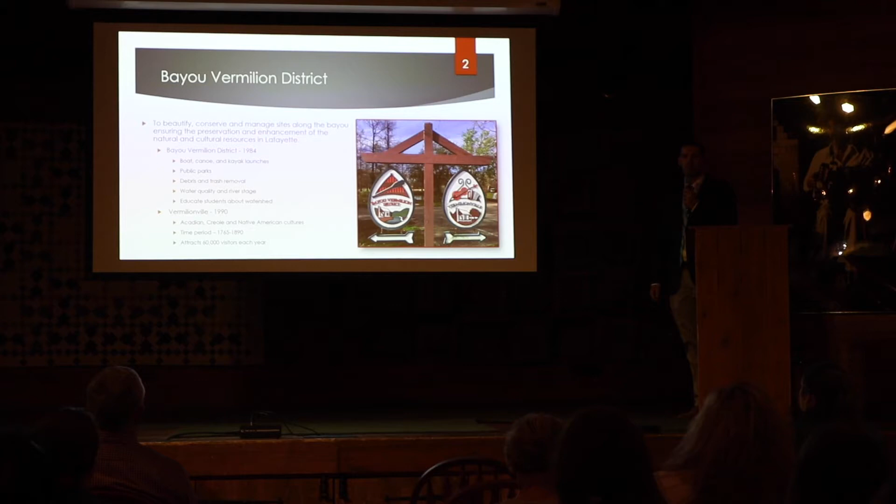On the cultural side of their mission, Bayou Vermilion District opened up Vermilionville Living History Museum and Folklife Park in 1990. And since then, the park has become one of Lafayette's premier tourist attractions, welcoming over 60,000 visitors per year.

So Bayou Vermilion District has put a lot of work into their project, and they have a vision of what they want to see the water research park to be. So when they came and introduced the project to us, they had a packet full of all their purpose for the park, their water flow features, as well as all the structures and designs of what they wanted to see in a park. So we took that as a great guideline to move forward with in designing these features.

According to Bayou Vermilion District's Department of Water Quality, some of the purposes of their park are to improve the existing water features by introducing water movement throughout them, which will actually eliminate some of the need for chemical maintenance. They also want to create multiple educational and demonstration areas throughout the park, as well as a new watershed exhibit, and they want to build a water quality laboratory to measure the water quality of the Vermilion River.

Bayou Vermilion District expects the Water Research Park to bring in about 100 visitors per day.

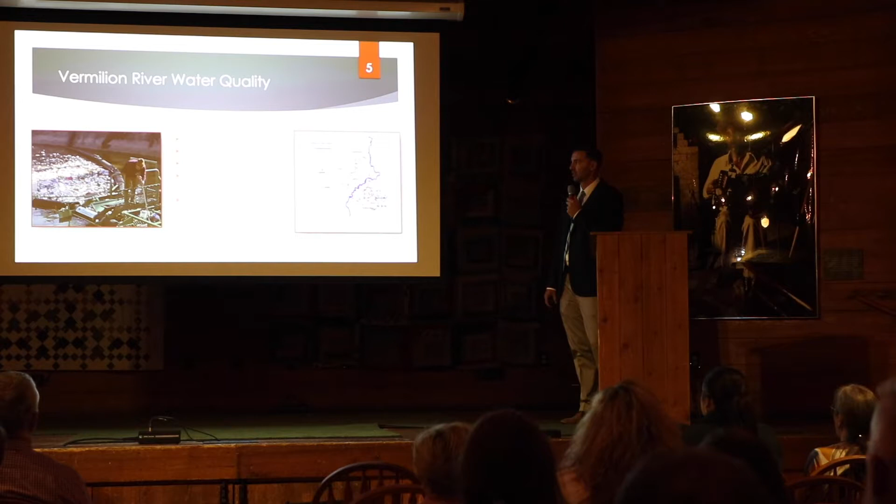So there's a couple of issues that stem the idea of creating a water research park. The first one is the water quality of the Vermilion River. The Vermilion River contains lots of trash and debris. It is very high in total suspended solids, total dissolved solids, and high in fecal coliform. It also has low dissolved oxygen levels. The Louisiana Department of Environmental Quality actually lists the Vermilion River watershed as impaired waters.

The second issue was the existing water features within the park. As you can see here, the aeration pond and the Petit Bayou, both of these existing water features, get supplied water from stormwater runoff, and the only way the water actually leaves the park is by being pumped into the Vermilion River. So during dry periods, the water is held up within these ponds with little to no movement, and the water becomes stagnant, which contains low dissolved oxygen levels and provides an environment for invasive plant species to thrive.

So once we were introduced to the project and we took the information that BVD gave us, we got to work as a class, and we came up with some objectives on what we wanted to do as far as designing the water research park.

One of the first things we did was we determined the watershed that flowed into the property, and we analyzed the stormwater runoff characteristics and how they actually affected the water research park.

Second thing we did was we designed all the water flow features throughout the park, as well as determined the flow rates that go through them.

We designed and analyzed all of the structural features throughout the park, along with their foundation systems. We also designed other features throughout the park while optimizing space in certain areas of the site.

We researched and determined the permits required to build the Water Research Park. And lastly, we came up with a cost estimate on how much we think the Water Research Park is going to cost to build.

Besides what we got from BVD, we sought out additional resources to help with our design. One of the first things we got were the original plans for Vermilionville from Domingue Szabo. We also got the proposed Water Research Park building from architect Lynn Guidry. We received site survey information from Spec Engineering and Lafayette Consolidated Government, as well as LiDAR data and subsurface drainage maps. All of our water quality and river stage information came from USGS.

Although we got a good bit of information, there were still some gaps. Luckily, we were close enough to the BVD property to perform multiple site visits, where we were able to do our own site surveying. Through these surveys we determined elevations of critical points throughout the site, the elevations of the existing water surface, and the depths of all the water features.

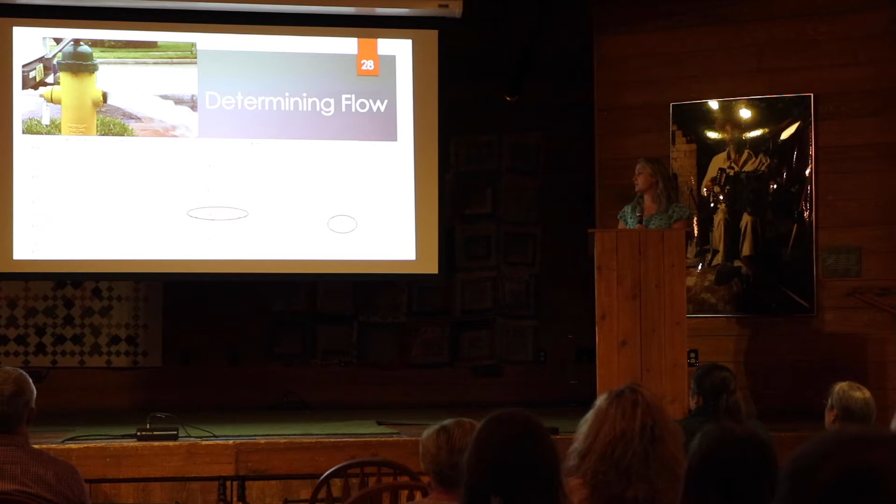This was found to be the ditch entering Petit Bayou. With that information, we then went through iterations of different velocities, taking into consideration erosion protection, weed prevention, as well as the client's desire to move water through the park. We came to a conservative velocity of about 0.5 feet per second with an approximate flow rate of 3,300 gallons per minute.

The graphic shown here is a fire hydrant that's pumping about one-third of what we plan to be pushing through the park. That's just to give you an idea, which you can't see, sorry.

We also needed to determine the floodplain delineations within our site. Shown in the red hatched area here is what is known as a floodway. There are very strict construction limitations when building within a floodway, so we tried to steer clear of that, even though we worked with it.

The green area shown here is known as flood zone AE for our particular property. This is defined by FEMA to be a high-risk area for a storm of 100-year return period, and has a base flood elevation of 15 feet, NAVD 88.

So I'm pretty pumped to tell you all about this next part of our design.

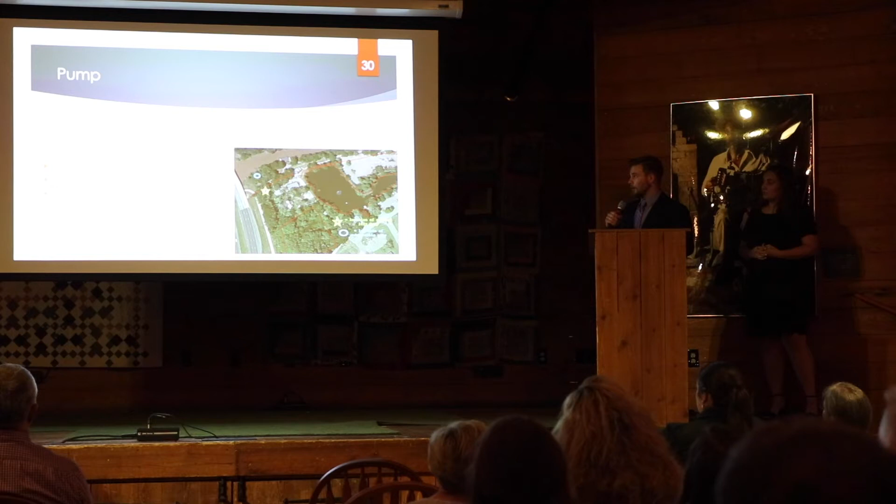After we came up with our design flow rate, the next thing we needed to do was figure out what type of pump we needed and the location, as well as the type of structure to protect that pump. If I direct your attention over here, denoted by this blue circle, this first option was a submersible pump with a wet well design placed inside of the floodway. Here, denoted by the yellow star, was an above ground structure with a suction lift pump outside of the floodway. After speaking to BVD, we decided the best option and the best design was the submersible pump with the wet well, due to its economical design and best design.

So here's a typical cross section if you were facing east. Here's the Vermilion River. The water would be gravity fed through this pipe here and into our wet well. Additionally, the water surface elevation in the river would dictate what the water surface elevation in the wet well would be.

Once the water is here, it will be pumped from our submersible pump up here and into our proposed channel. Additionally, if we ever needed to cut off the flow of water from the Vermilion to our wet well, we install a valve right here.

We chose the invert of this pipe here to be based off the 10th percentile water surface elevation of the Vermilion River. That way our clients can utilize their pump almost 90% of the time. We got that data from the USGS Surrey Street gauge and correlated the elevations accordingly.

Additionally, we needed to size this pipe in order to give us our design flow rate. We need this pipe to supply enough water for that flow rate. To do that, we used everyone's favorite equation, the Hazen-Williams equation, with the frictional losses and the minor loss equations, to iterate and find an adequate size of 18 inches. We double checked that and it confirmed that it will supply our pump.

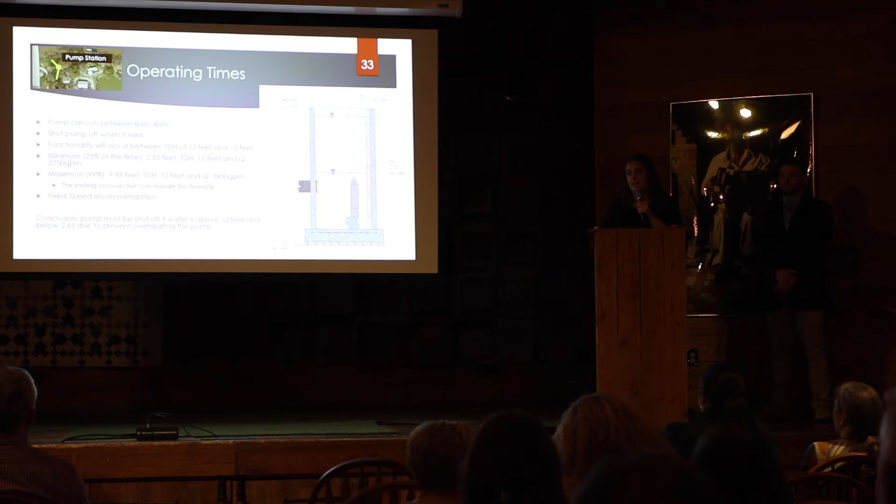We also wanted to narrow down our operational constraints by picking a minimum and maximum water surface elevation in the river, which is also the same water surface elevation in the wet well, to find our minimum and maximum flow rates and total dynamic heads, to make sure our pump will not be overheated or cause erosion throughout our system.

Our minimum water surface elevation, denoted by this line right here, is 2.65 feet. Anything below 2.65 feet in the river needs to shut off the pump because it will cause overheating in the pump.

Here is the maximum water surface elevation of 9.98 feet. This will provide a maximum flow rate of 3,450 gallons per minute, which is greater than our design flow rate of 3,300 gallons per minute.

Knowing our maximum flow rate, we then had to make sure and prove that this flow rate will not scour or cause erosion through our limiting cross section, and through calculations we did prove that to be true.

So starting our system, we place an 18-inch ductile iron pipe in the Vermilion River at 2-foot elevation. We make sure not to encroach upon the right-of-way of 100 feet set by the Army Corps of Engineers. This pipe is 150 feet with a 0% slope, and to prevent the pump from being damaged by debris...

We designed a T-shaped screen that has a spacing of 2 inches. This is to prevent the maximum debris from getting into our pump. Also, we increased the diameter of our screen to slow down the velocity so that debris does not get matted up against the screen.

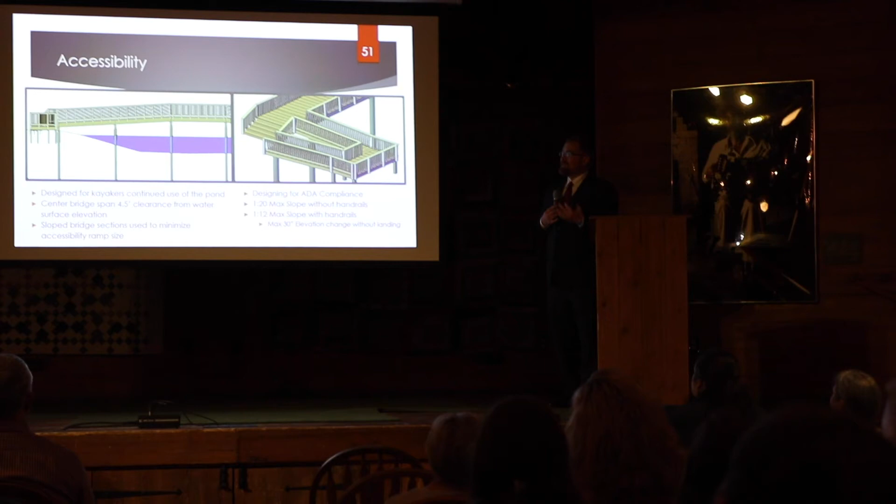Now that we have the horizontal location of the bridge, we turn our attention to the vertical location. There were two requirements we considered: first was the hydraulic features flowing beneath the bridge, and second was a client request to continue allowing kayakers to utilize the entire pond. We did some research and determined a 4.5-foot clearance from the water surface elevation would allow for this, and this requirement governed our design.

Now that we have vertical and horizontal locations determined, we turned our attention to pedestrian access. We designed this with the American Disabilities Act, ADA, in mind, and also to work within the space we had available. We turned to a sloped bridge on the outermost two spans, which you can see on the left-hand side. This slope was slightly less than 1 on 20, which was adequate for a continuous ADA-compliant slope.

That gave us about 2.5 feet of the 4.5 foot requirement. For the remainder, we looked at steps and handicap ramps, again designed for ADA, including features like handrails and guardrails. It would look very much like the rendering on the right-hand side.

I'd like to start off by introducing the main purpose for each of these structures. The pedestrian bridge serves as a clear path for site tours. It also provides access to different locations on the site with minimal travel. The pier, a tourist feature, allows for fishing as well as providing an assembly area with benches where tourists could gather, take pictures, and enjoy the beautiful scenery of Vermilionville.

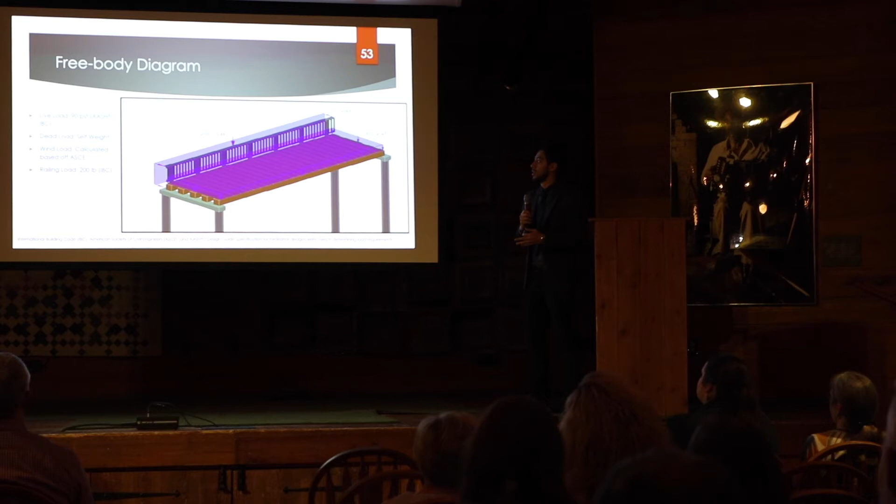The 200 pound load in each direction is a concentrated point load that the guardrails would be designed to resist, providing rigidity for the structure as well as an additional factor of safety for pedestrians. All these loads are minimum requirements based on the International Building Code, the American Society of Civil Engineers, and the AASHTO Design Guide for Pedestrian Bridges.

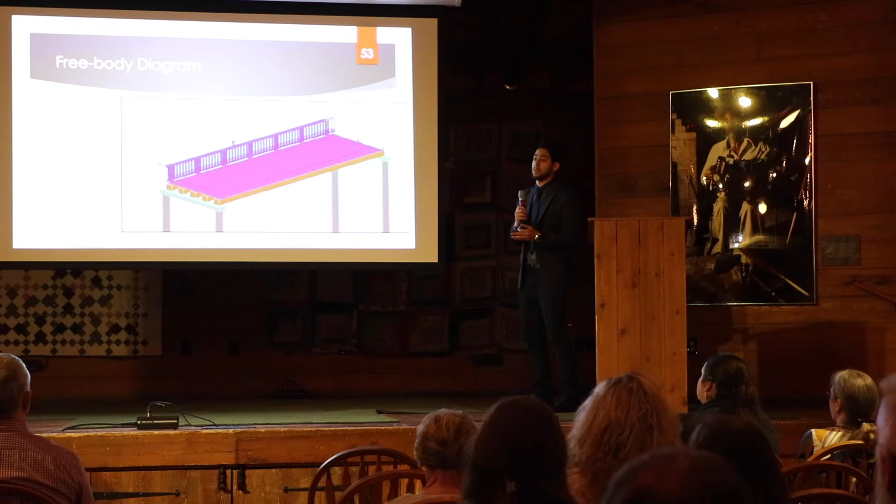Now I'd like to highlight each of the members we had to design for and what role they play in supporting the structure. In purple, we have the deck boards, which serve as the main walking surface for pedestrians. The loads on the deck board are supported by these 5 beams shown below, referred to as stringers. The loading on the stringers, as well as self-weight, is transferred onto the green beam here, referred to as a bent.

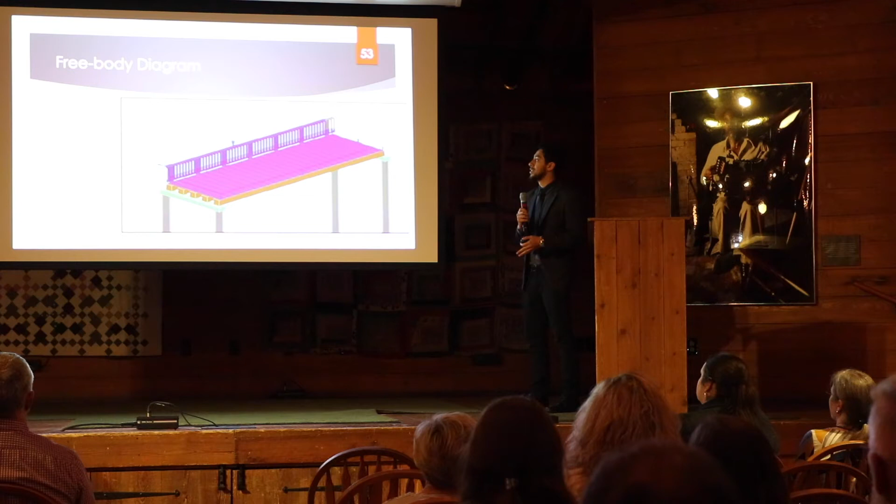The bent would then be held up by these 2 gray-looking columns known as pile supports. The piles would be driven deep into the ground to provide enough resistance and stability to uphold the entire structure in place.

Our design procedure was all done in accordance with the National Design Specification for Wood Construction. All of the members that we had to design, which I highlighted in the previous slides, were analyzed as bending members. These are the deck boards, the stringers, and the bents.

As a result, the member sizes were selected to satisfy 3 design parameters: flexure, shear, and deflection. Flexure design states that the bending strength of a member must exceed the bending stresses that act on it, as shown in that figure. Shear design states that the shear strength of a member must exceed the applied shear stresses on that member. Shear stresses are the stresses that act parallel to a material surface, as shown in the figure below, caused by the loading that acts on that member.

Finally, the International Building Code dictates that the maximum deflection a member can experience must not exceed 1/360th of the member length.

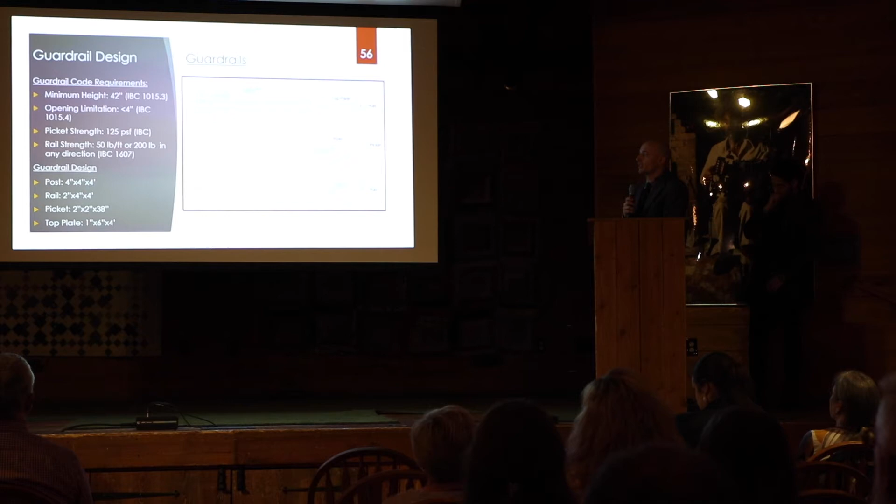Now moving on to the design of the guardrails, which were used for both the fishing pier and the pedestrian bridge. Code dictates many of the requirements for them. There's a minimum height requirement of 42 inches with respect to the top of the walking surface. There's also an opening limitation, meaning a 4-inch sphere should not be able to freely pass through any of the openings located throughout the guardrails.

Pickets must be able to withstand a 125 pound per square foot pressure. The guardrails themselves must be able to withstand either a 50 pound per linear foot distributed load or a 200 pound concentrated point load applied vertically or horizontally. On top of that, the guardrails must withstand wind pressure and support their own self-weight.

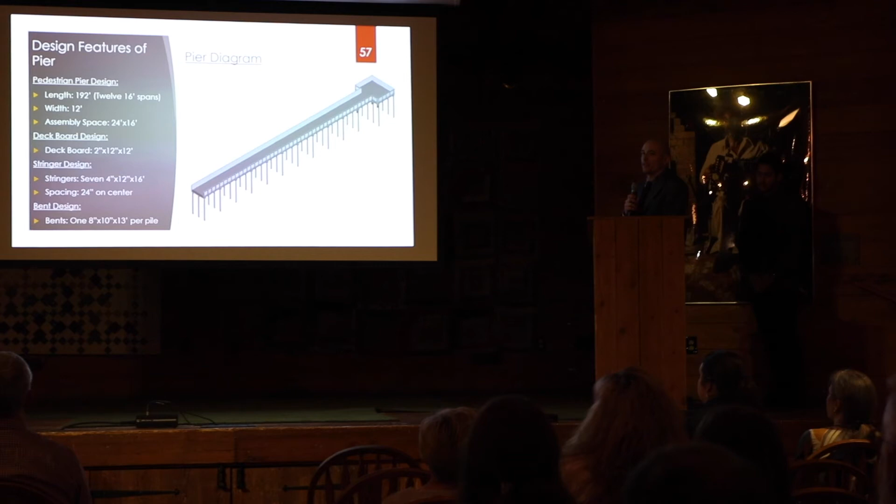Taking all that into consideration, this is a visual of what a typical section would look like for our guardrails. Now moving on to the design features of the pedestrian pier, we went with a total length of 192 feet, consisting of 12 16-foot spans. For the first 11 spans, the width was 12 feet wide, and the last span was a dedicated assembly space to hold around 25 to 30 people for tour groups. We believe a 24-foot by 16-foot section would be adequate for up to 32.

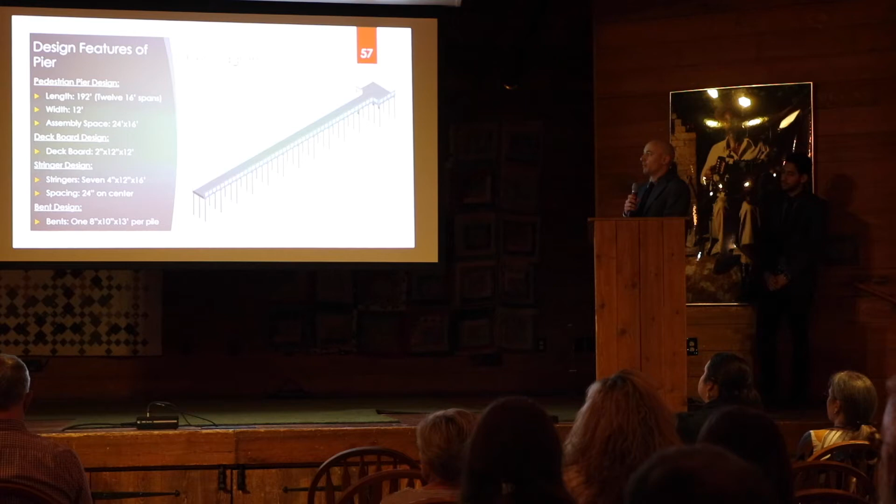As for the design of specific members, we used 2x12 deck boards to support the loads from pedestrians. Those loads, along with the guardrails, were transferred to 7 4x12 stringers, and finally all of that was supported by one 8x10 bent.

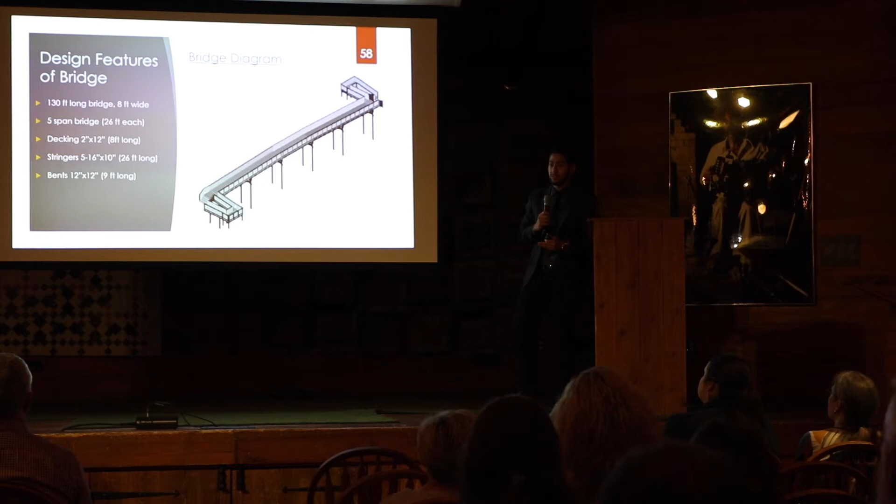The pedestrian bridge design features discussed here include member sizes selected to satisfy the design criteria discussed in previous slides. The pedestrian bridge would be 130 feet long, 8 feet wide, and a 5-span bridge with each span running 26 feet long. The decking would consist of 2-inch thick by 12-inch wide deck boards at 8 feet long each.

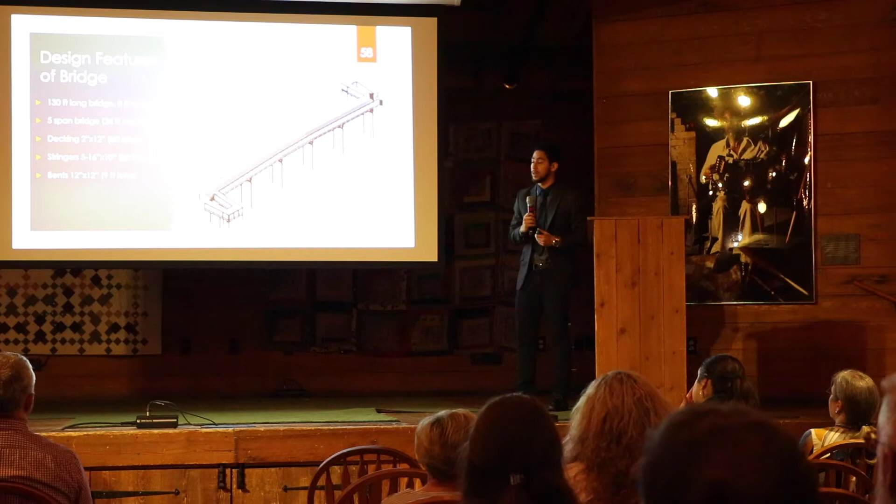These deck boards would then be supported by 5 stringers. Each stringer would be 16 inches thick, 10 inches wide, and 26 feet long. This would all then be supported by 9 feet long, 12-inch by 12-inch bents.

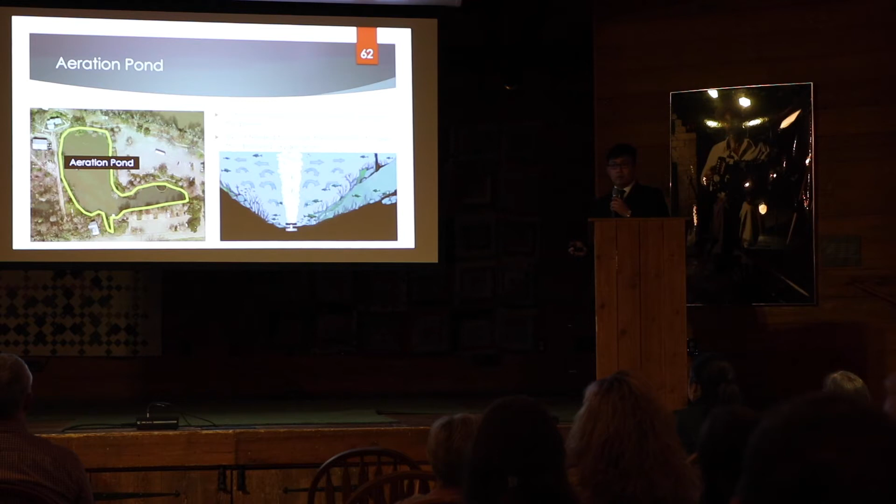Now let us talk a little about the aeration pond. Currently, the aeration pond has diffusers, bubblers, and water fountains, and these water features are important for us, for BBD, to increase the dissolved oxygen level within the pond. Therefore, our client intends to keep these water features in the pond to maintain a proper level of dissolved oxygen to support aquatic life within the pond.

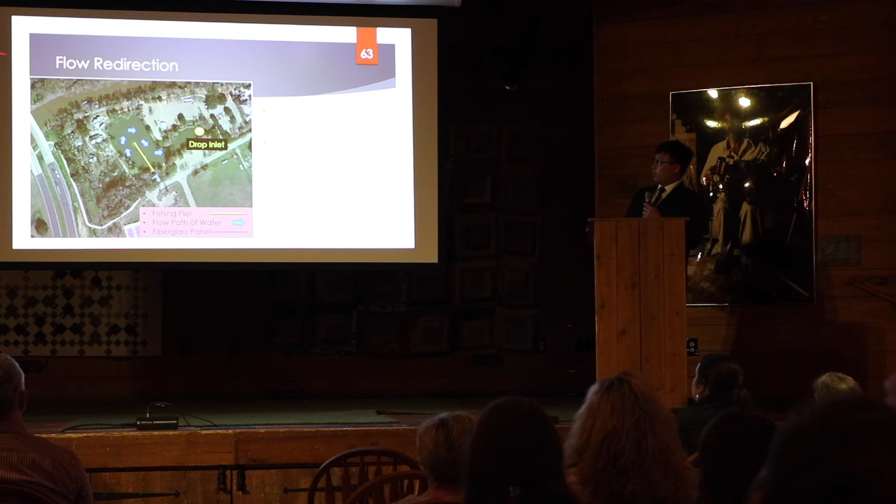In order to prevent stagnation within the pond, our client also intended to redirect the flow of water around the fishing pier before it ultimately discharges into the drop inlet. To achieve this flow redirection, we propose to attach a fiberglass panel to the west side, along the west side of the fishing pier.

The fiberglass panel that we recommend to use is the fibercore panel from Fibertech. It comes with an exterior gel coating which provides resistance to UV degradation and weathering effect. In addition, the manufacturer also certifies that their panels are rot-proof and corrosion resistant, and ultimately the lightweight nature of the fiberglass panel drives us into making this recommendation.

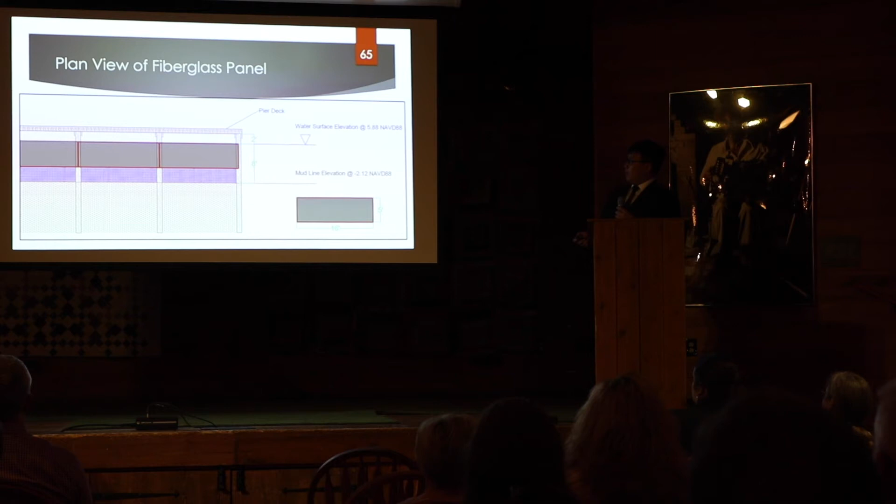To get a better idea of where the fiberglass panel will be installed on the pile, this diagram shows the front view of the west side of the pier. As you can see here, each fiberglass panel is 16 feet long, 5 feet wide, and 3 millimeters in thickness. The fiberglass panel will be secured at water surface elevation.

If you look at the diagram again, there will be a space between the fiberglass panel and the bottom of the aeration pond, where the mud line will be. The reason for this gap is to allow some of the water to flow under the fiberglass panel, to prevent stagnation of water under the fishing pier.

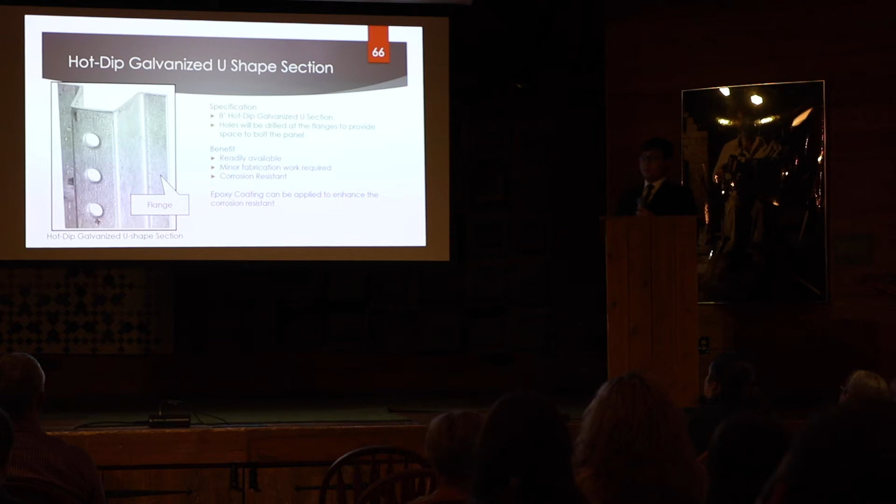In order to secure the fiberglass panel on the fishing pond, we propose to use a hot dip galvanized U section. The reason we chose this section is due to its availability in the market and the nature of hot dip galvanized steel being corrosion resistant.

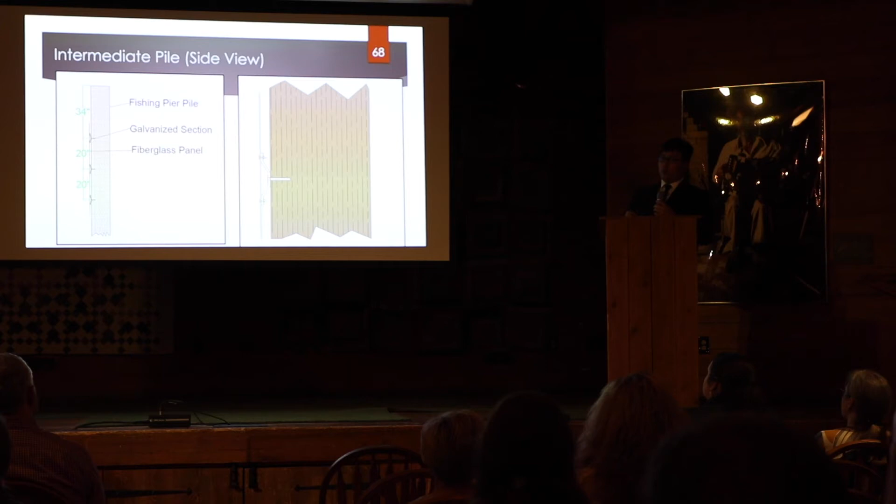To get a better image of how the U section will be used to help us secure the panel to the pile, this diagram shows the proposed placement of U section onto the different sections of the piles. As shown in the previous slide, on the intermediate pile, we will have 3 U sections spaced at 20 inches apart. On the right hand side of the diagram, this shows the proposed method of attaching the whole system onto the pile.

Currently, there are 3 existing aeration units as well as a fountain feature located within the aeration pond. Assuming that only half the pond will be aerated due to the flow diversion by the pier, at an average temperature of around 68 degrees Fahrenheit and an approximate water depth of 8 feet within the aeration pond, we determined that the existing 3 aerators need approximately 40 hours to raise the dissolved oxygen levels from 3 milligrams per liter, which is a typical value found in the summer months from the Vermilion River, to our recommended number of 5 milligrams per liter within the pond.

Now let's talk about the aeration pond drop inlet. The existing drop inlet on site has an elevation of 6.38 feet NAVD88. We are proposing to drop the inlet by 6 inches, thus gaining us approximately 1.3 acre-feet of storage. This gain in storage is vital for us to fulfill the no net fill regulation.

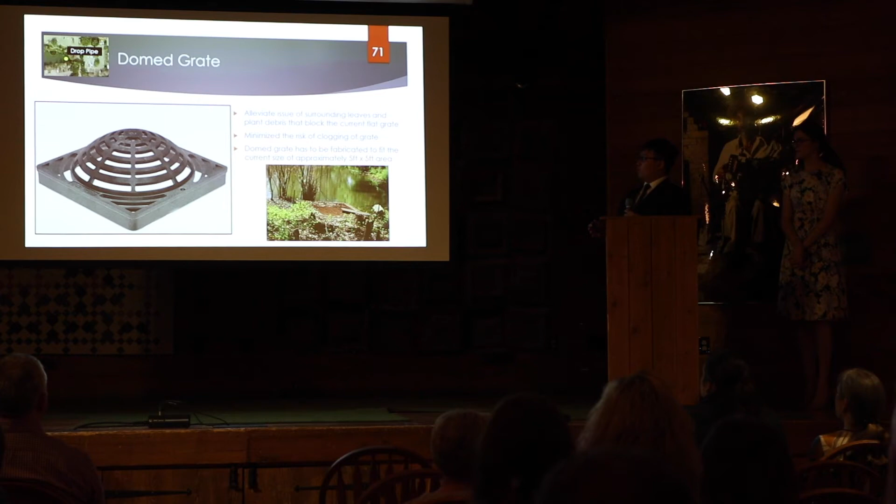As shown in the previous slide, the existing drop inlet has a flat grate that is often clogged up by plant debris. In order to alleviate this issue, we propose to replace the flat grate with a domed grate that provides a larger surface area for water to be discharged into the drop inlet.

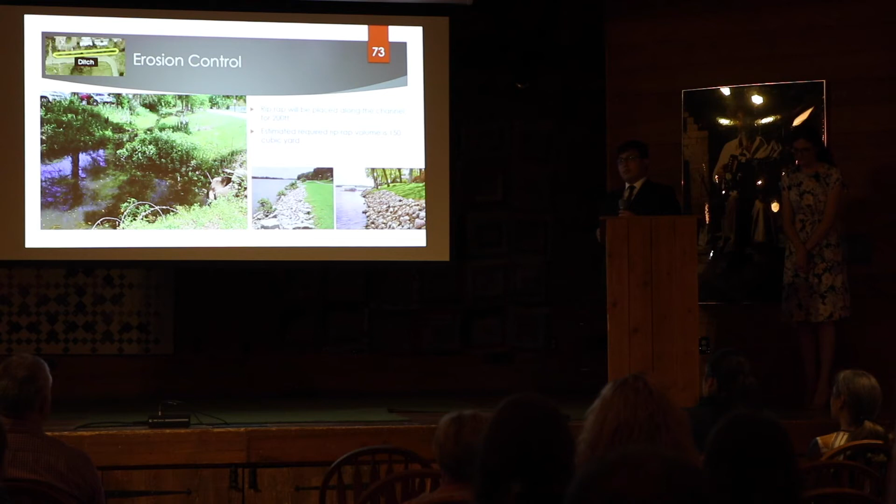The water that is discharged in the drop inlet will be discharged into this ditch before flowing into the Petit Bayou. Therefore, erosion control in the ditch is important. In order to minimize the effect of erosion at the ditch, we propose to line 200 feet of riprap along the ditch. We believe this will minimize the erosion effect.

As water enters the Petit Bayou, it reaches the end of our research park. Currently, the only way water can get out is via 2 stormwater pumps within Vermilionville. It is our objective that for any water we introduce to the park, we do not have to use these pumps. We will do this via a passive outlet.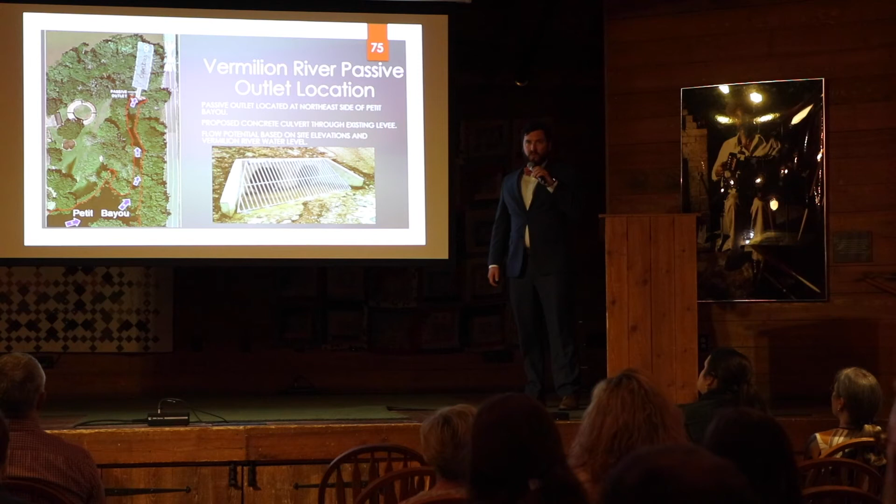The location of our outlet will be at the northeast corner of the Vermilionville village. Here, a levee separates Petit Bayou from the outlet ditch which leads to the Vermilion River. We propose using concrete culverts along with grating to keep out any debris or critters it may encounter. The flow potential through the culverts will be dictated by the inflow towards the culverts as well as the water surface elevation of Petit Bayou and Vermilion River.

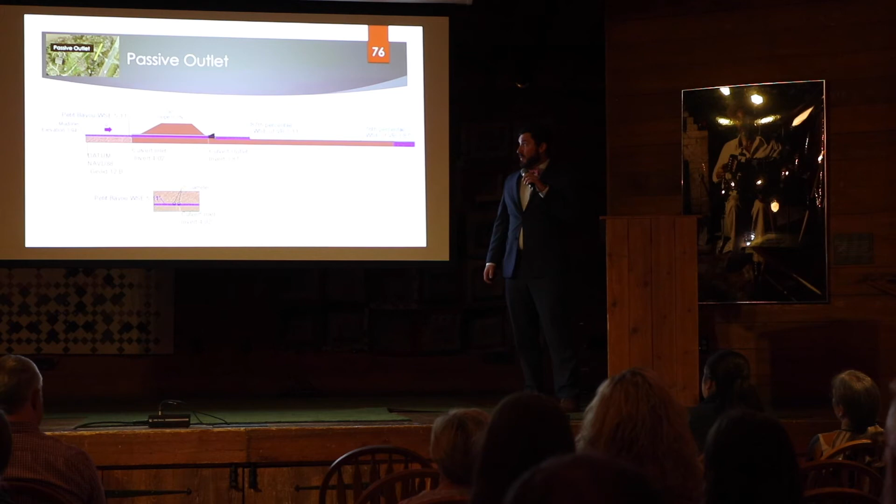Taking a look at the profile view of our passive overflow, we see that the designed water surface elevation of Petit Bayou is roughly 5 feet. With the help of our HEC-RAS model, we recommend setting 2 2-foot diameter concrete culverts at an invert of 4.02 feet. With a 0.3% slope, this will allow us to discharge our maximum flow of 3,450 gallons per minute. The Petit Bayou will be able to discharge so long as the Vermilion River is below 5.11 feet.

As the river rises above 5.11 feet, however, we will have to mitigate backflow. We recommend doing this with a duckbill check valve. We selected this device because of its low cracking pressure as well as its low head loss compared to other backflow prevention devices. Furthermore, it requires little to no maintenance and is able to seal around small amounts of debris while still preventing backflow from Vermilion River to Petit Bayou.

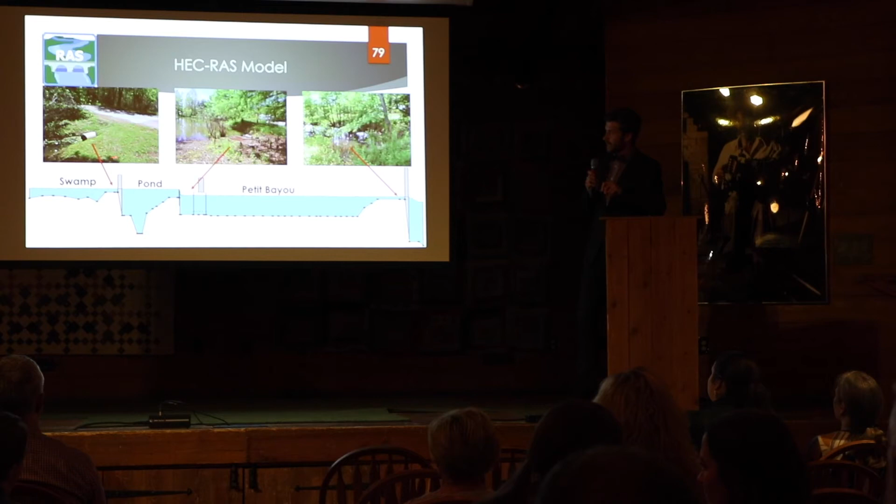First, the water enters the swamp and exits here through a culvert under the service road into the pond, where it leaves through the drop pipe into Petit Bayou, and finally exits through our proposed passive outlet into the Vermilion River. 2 models were run, one for the existing and one for the proposed structures.

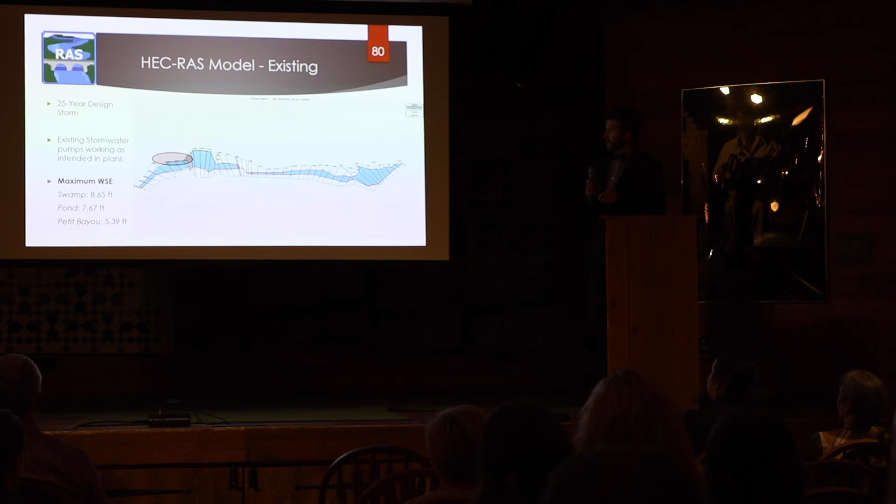Here are the outputs of the existing model. The flow shown represents a 25-year design storm with the existing stormwater pumps running as intended in the original plans, with a float set to 5.38 feet. You can clearly see that the water overtops the banks on the north side of the swamp, showing us that we need to build up a berm to retain the stormwater.

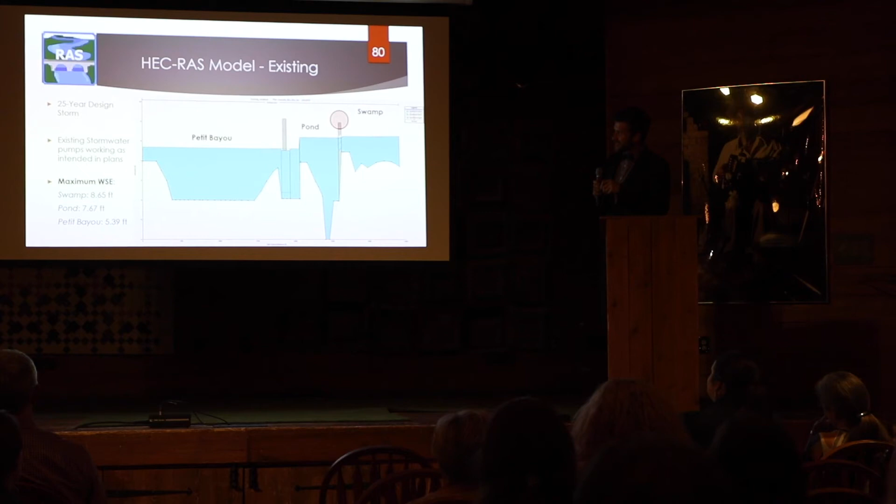Now, to avoid confusion, this image is flipped from images seen before, and this is just because HEC-RAS was being stubborn and wouldn't let us flip the image in animations. But you can still clearly see the road here, showing us the need to raise the road and redesign the culvert underneath.

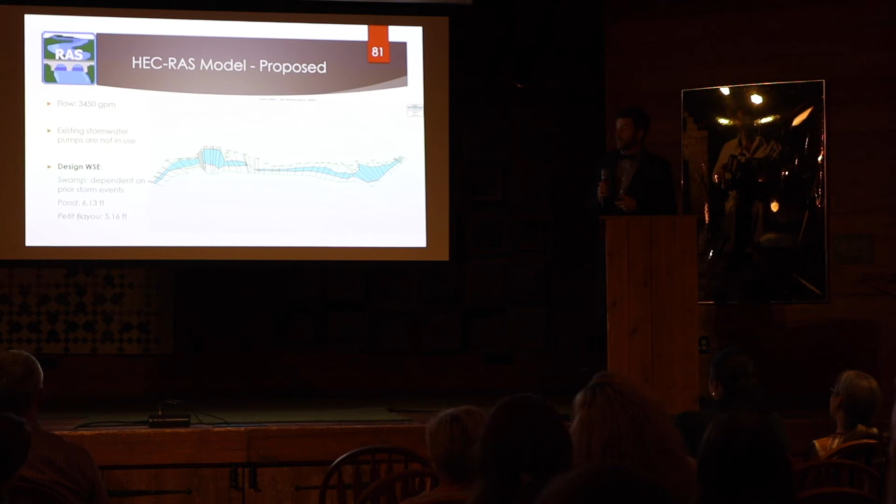In the proposed model, the shown flow is 3,450 gallons per minute, our maximum design flow, and the existing stormwater pumps are not in use. As you can see, the fluctuation in the water surface elevation is minimal, and a better view to visualize this is the profile plot, where you can see that the water will fluctuate about half a foot throughout our day-to-day pumping operations, and it will peak at 5.16 feet in Petit Bayou.

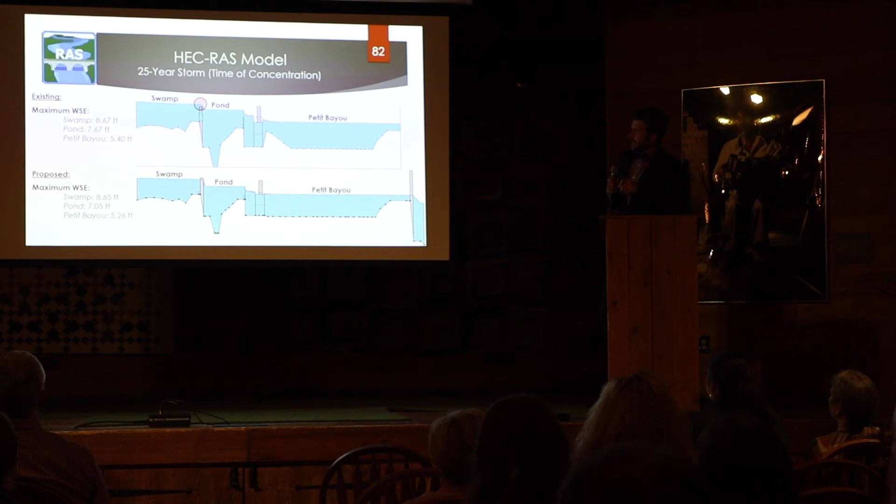Now to the results of our design. In the 25-year storm, in our proposed design, the road will not be overtopped anymore. Also, the stormwater in the swamp is contained by the banks, and we have created more storage by dropping the drop pipe from 6.38 feet to 5.88 feet.

Finally, HEC-RAS also gave us an idea about the usage of the existing stormwater pumps. Currently, these pumps are run manually, which made it hard for us to estimate the pumping hours. This will be changed in our proposed conditions.

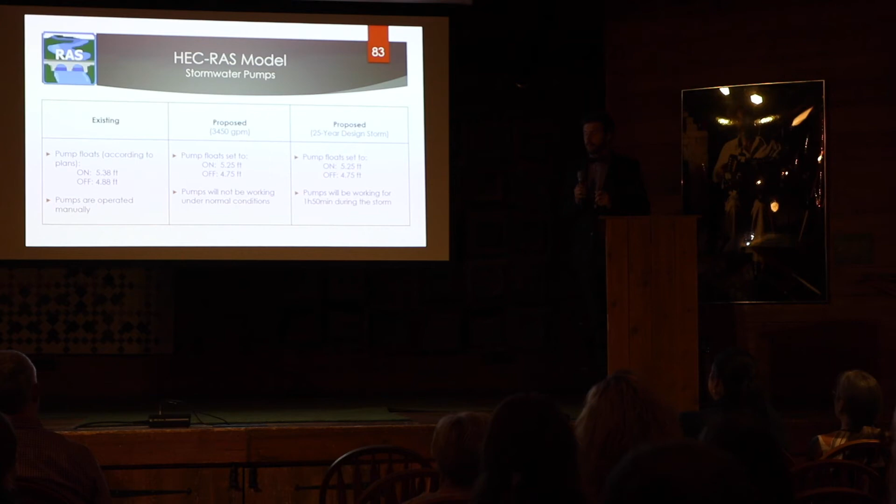The pumps will not be running in day-to-day operations due to the float being set higher in Petit Bayou than the water surface elevation, and they will only run for about 1 hour and 50 minutes during our 25-year design storm. Again, we've created some storage by dropping the pump float by 0.13 feet, from 5.38 feet to 5.25 feet, making our design more predictable, economical, and most importantly, less likely to flood.

We were really hoping Franz would do a little bit of that in German.

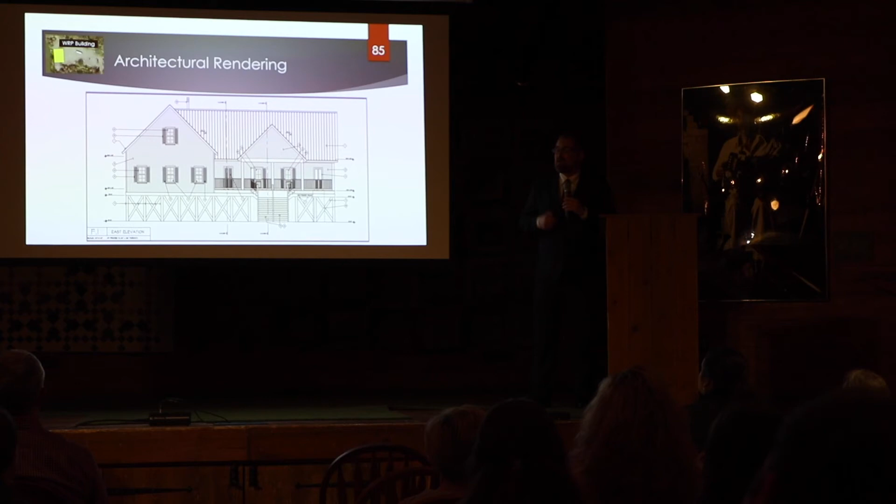Here we have an architectural rendering provided to us by Mr. Guidry, who is the architect currently working on the structure. This structure will be utilized for two purposes: on the right-hand side will be a watershed exhibit space, and on the left-hand side will be laboratory and office spaces.

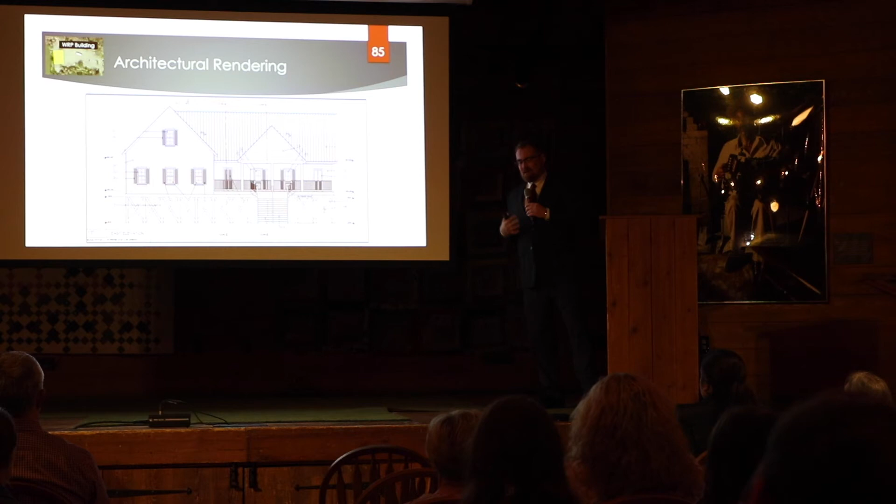Typically, a structure of this type will be designed by a code called IBC, the International Building Code. IBC is a prescriptive code. For most situations, it will require minimum member sizes and spacings, things of that nature, and this building will be designed in that method.

Some might be thinking, well, what did y'all do? Fortunately for us, this building has several components that fall outside the limitations of this code, specifically the roof structure above the exhibit space.

It's a very large span, a very large open space, and the floor systems -- due to the loadings that will be applied to that system. The other task we had was to analyze the building as a whole to come up with loadings on the foundation so we could do foundation design.

ASCE 7-10 and the International Building Code required that the exhibit side of the building be classified as an assembly space with a recommended live load of 100 pounds per square foot, and the laboratory side be classified as an office space with a recommended live load of 50 pounds per square foot.

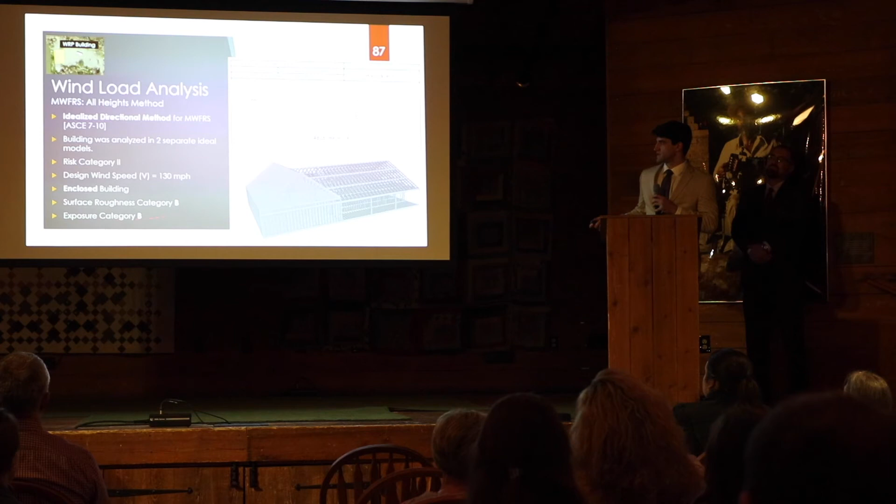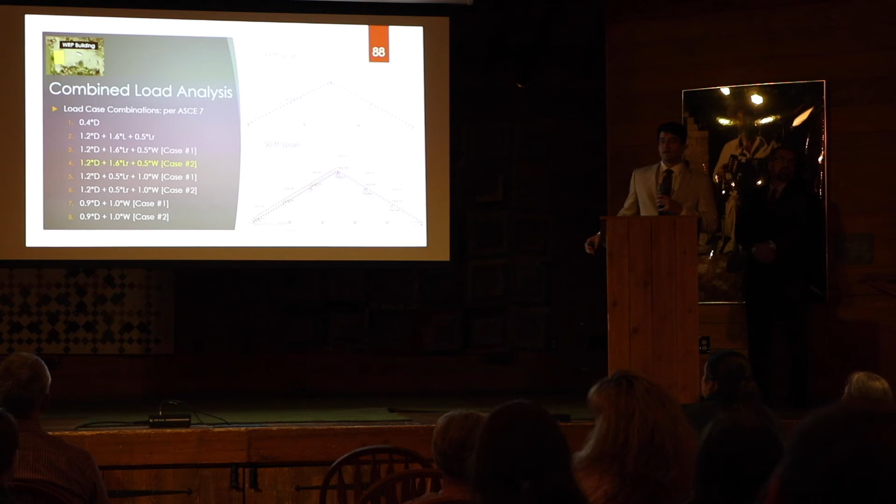In order to conduct our wind loading analysis of this building, we considered two systems and split the building in two. This gave us two idealized models to conduct our wind loading analysis for various wind loading conditions. Eight load case combinations were used in our analysis, and the one that yielded the highest loading results, the worst case scenario, governed our design. This is what we used to design our members.

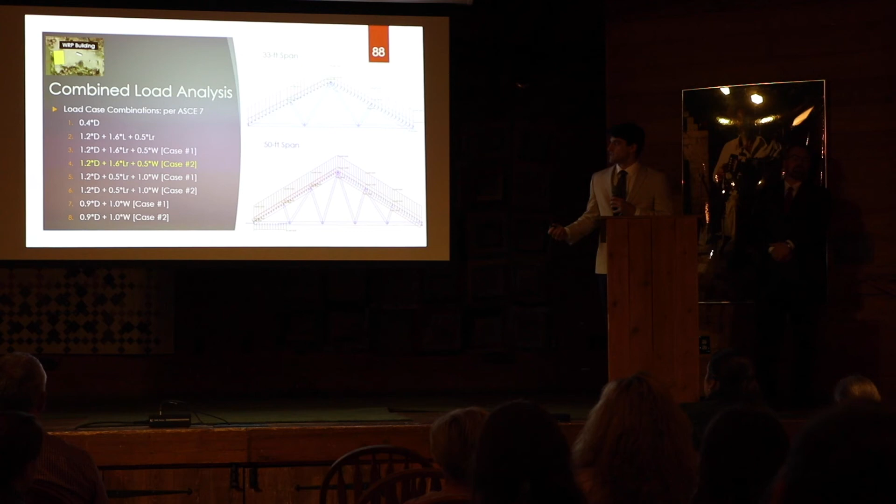What we chose was Southern Pine number 1, and the National Design Specification for wood construction was utilized throughout our design process. The main strengths checked were bending, shear, tensile, and compression, perpendicular and parallel to the grain of the wood.

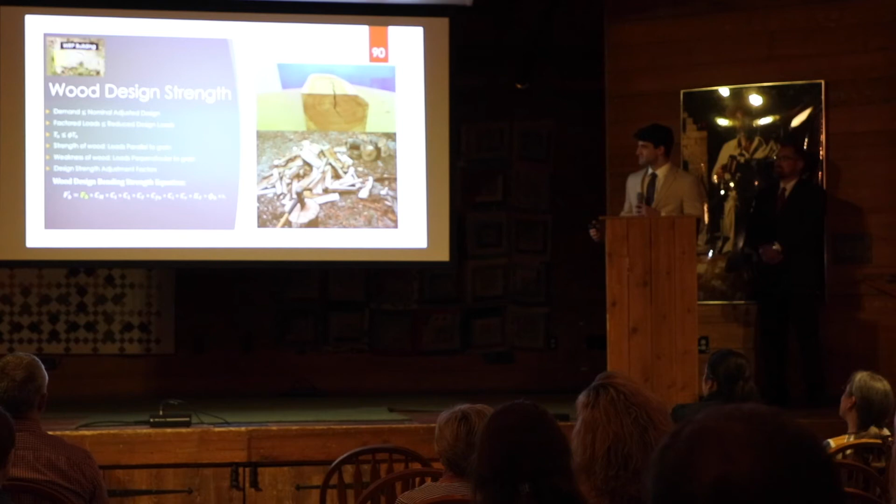We had to make sure that the loads we calculated previously remained less than our design loads, so we checked every single one of them as stated. It's important to know that this would prevent failure in even the worst case scenarios.

Wood is not a homogeneous material. It's not uniform throughout, which means it splits easier one way, as shown -- that's why you chop wood like that and not the other way. So if a tensile load is applied parallel to the grain of the wood, it resists a lot better; perpendicular, not so much.

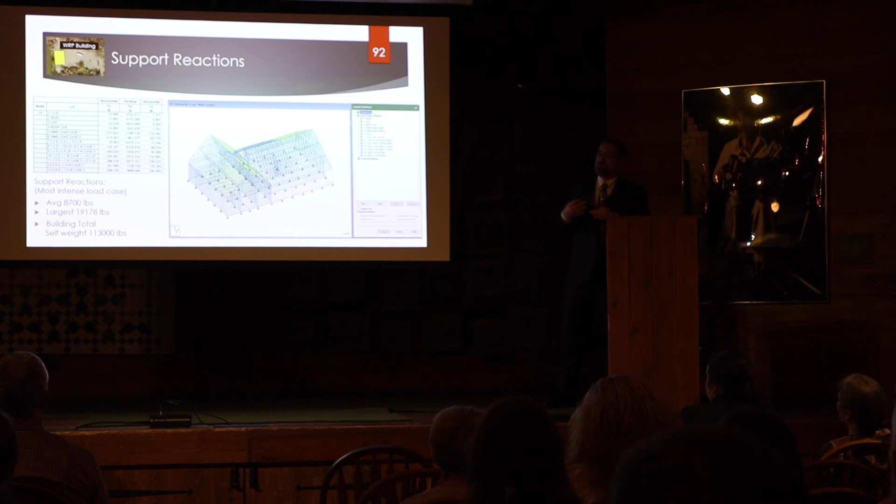Each one of the black triangles is a pile location. The pile locations were determined by two things: we placed piles directly underneath the bearing walls, and we also equally distributed loads in the large spaces.

On the right-hand side, you'll see all the load cases we analyzed, and on the left, you'll see an example of one of the piles, the results that the software produced for one of the piles, highlighted here in red as the worst case scenario.

A couple of facts about that worst case scenario: the average loading on each pile was about 8,700 pounds, and the peak underneath some of the load-bearing walls was about 19,000 pounds. The building as a whole, unfactored, had a basic weight of about 113,000 pounds. We took all this data, compiled it, and used it to analyze the design of the pile foundations.

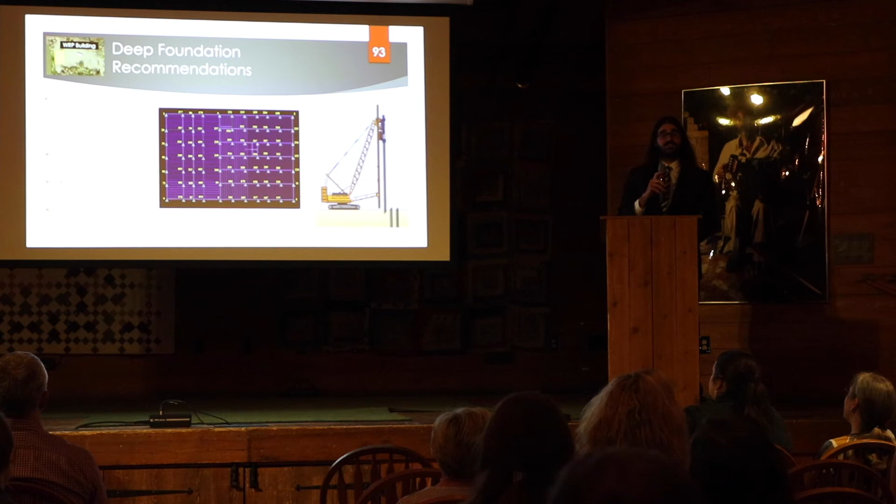Following the structural analysis, the next step was a geotechnical analysis to determine how deep each of the piles must be embedded into the soil layer below to ensure proper capacity so that the structure remains intact.

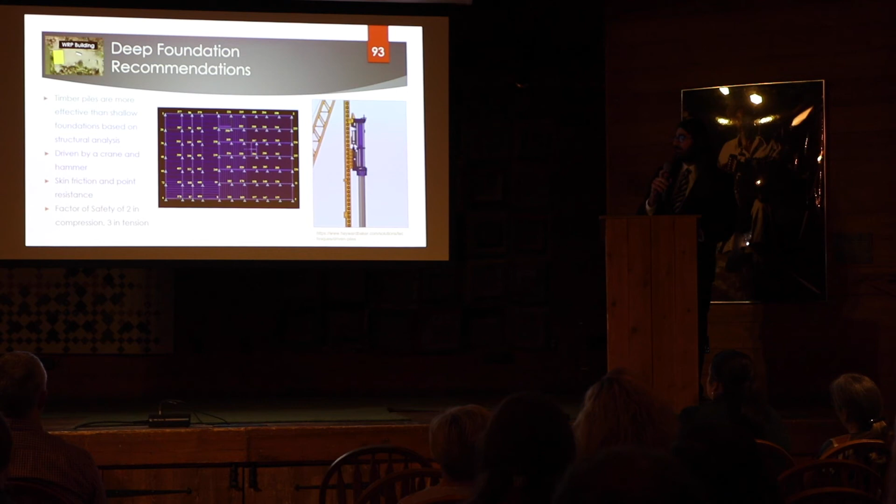Shown here is a crane driving a pile into the subsurface strata via hammer, and it was decided that each pile would go under each of the triangles shown in the graphic here.

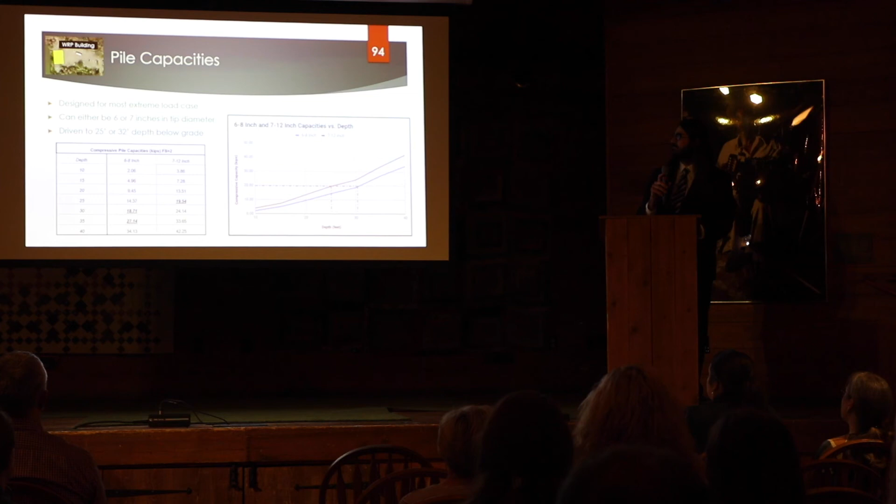Throughout geotechnical calculations, it was decided that the most effective bearing depth was 25 feet below grade to ensure that each of the 7 to 12 inch diameter piles would be capable of supporting the loads imparted by the structure in even the most extreme loading cases.

With the addition of the aforementioned WRP building, the existing parking lot on site would have to be redesigned. We wanted to do this in a way that would minimize the loss of parking on the existing parking layout, so we needed to look at the existing conditions in that parking lot.

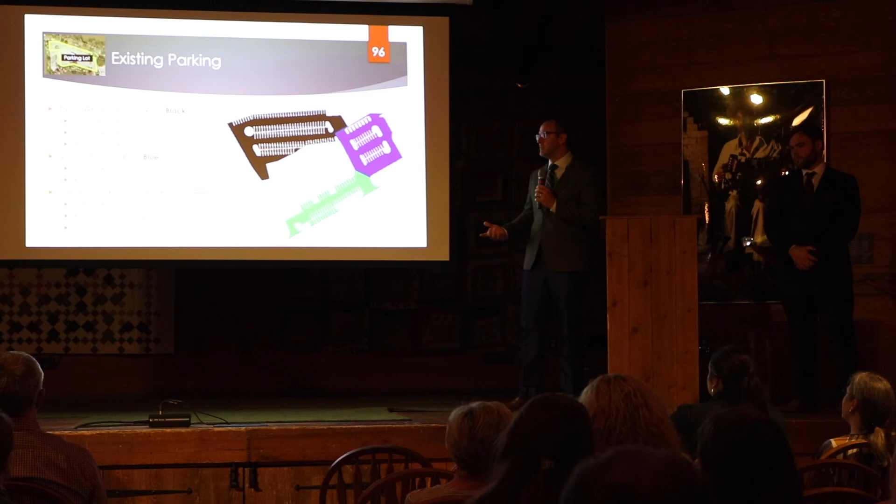Briefly, we'd like to display all the parking existing in the BBD project area. Shown here in black is the location that will ultimately serve as the BBD Education Center building parking. In blue is Vermilionville parking, and in green is Fisher Road adjacent parking, which is excess parking for both the BBD and Vermilionville.

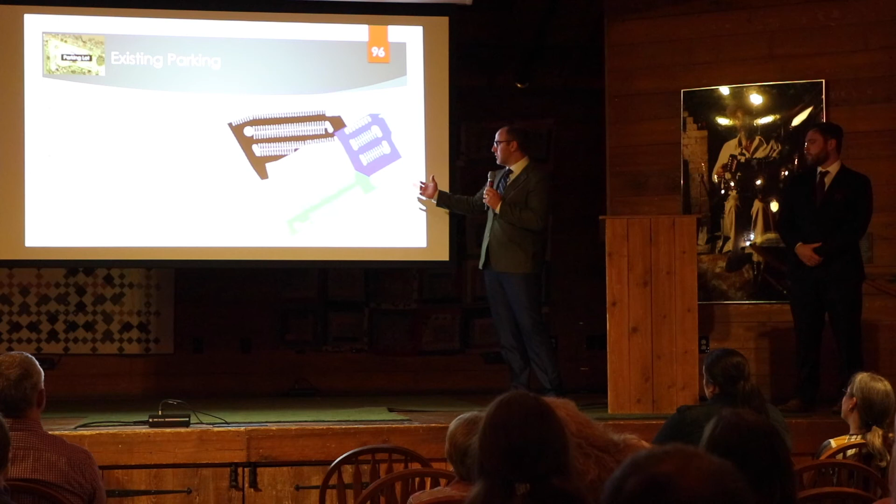We are proposing that all surfaces within this location be resurfaced and restriped, with the exception of 4 demonstration areas of pervious pavement that BBD will have installed as an educational display.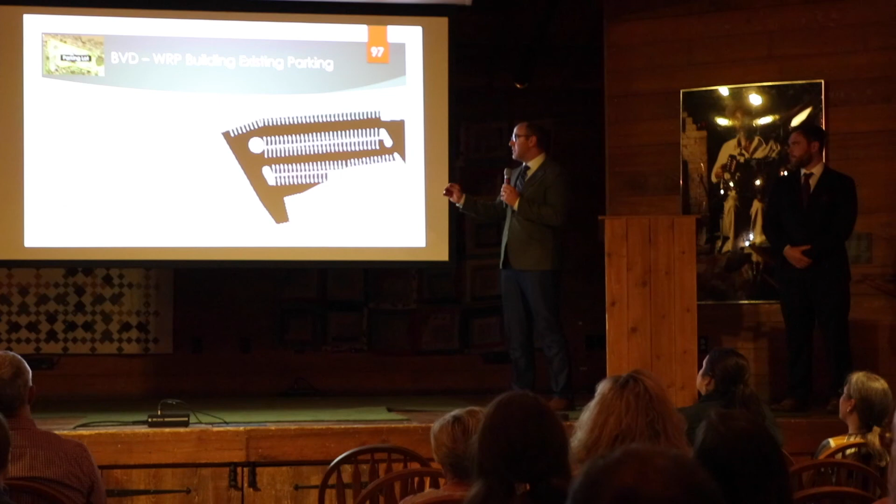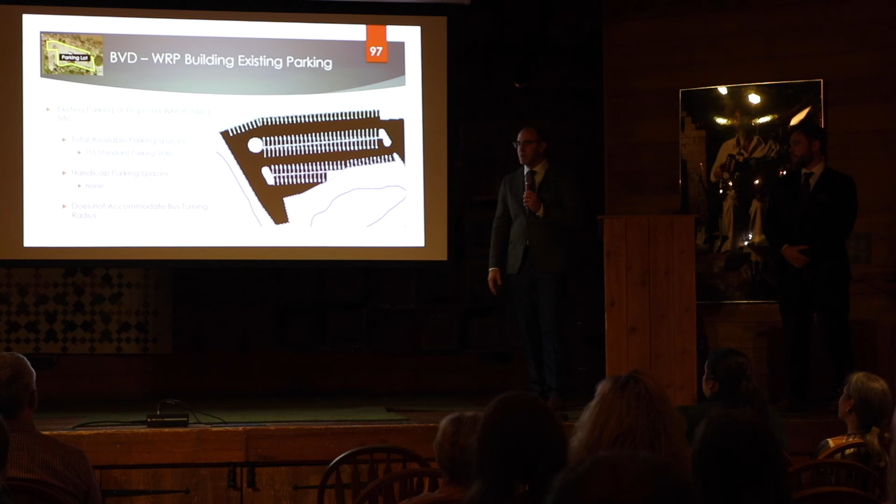Expanding on the parking lot that will see a redesign: currently we have 155 parking stalls, none of which are handicap accessible. Also noted is that in the current layout, a bus is not accommodated traversing this parking area.

As shown here, we have our proposed design for the parking lot layout. This parking lot is going to consist of 111 total parking spaces, which is 44 less than what's currently existing. Of those 111 spaces, we have 106 standard stalls, as well as 5 handicap accessible stalls.

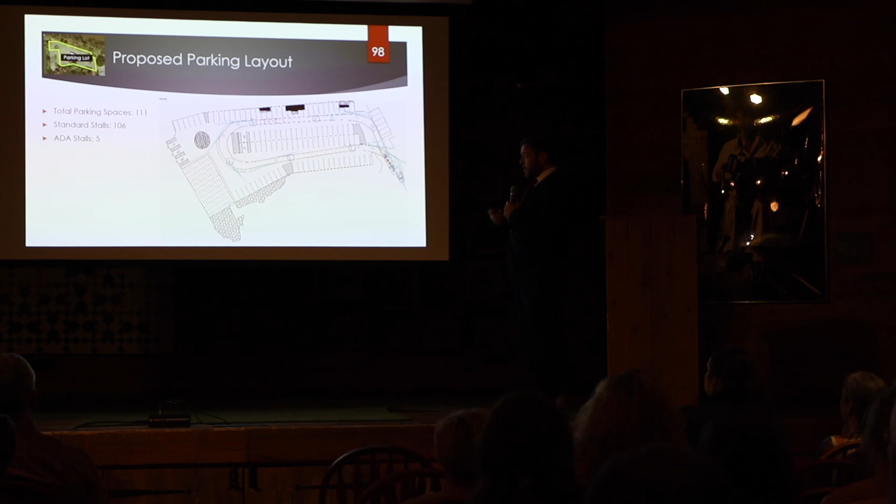You might be wondering what's going on in the video here on the screen. That's actually our design vehicle, an AASHTO extra large school bus traversing the parking lot. Through the use of an extension of a program called Civil 3D, we were able to plot the vehicle's path in our parking lot and check for any conflicting points. As you can see, the bus is able to traverse the parking lot layout, so our design is adequate.

This is to keep with the aesthetic of the park, as well as combat the cypress knees in this area of the pond. We're also proposing that this walkway be elevated approximately 1 to 2 inches above grade to allow stormwater to pass underneath it.

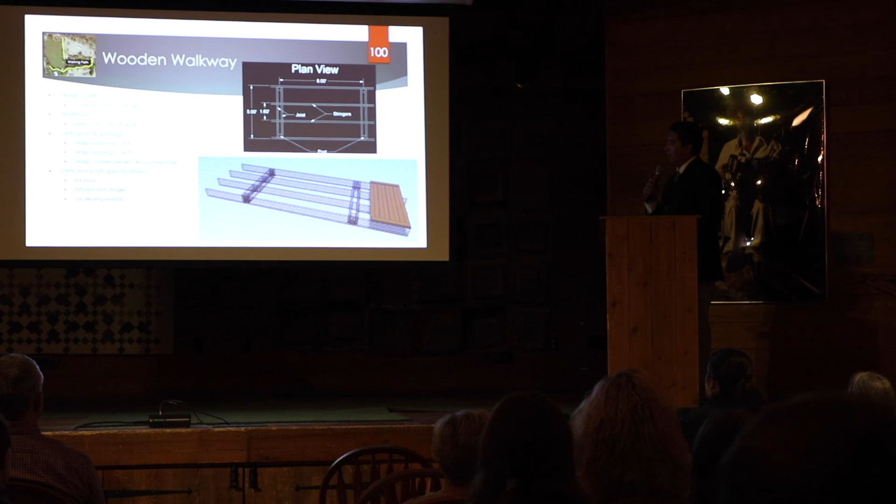As you can see here, we have this beautiful 3D rendering of the proposed design of the wooden walkway. This walkway was designed to comply with the international building codes.

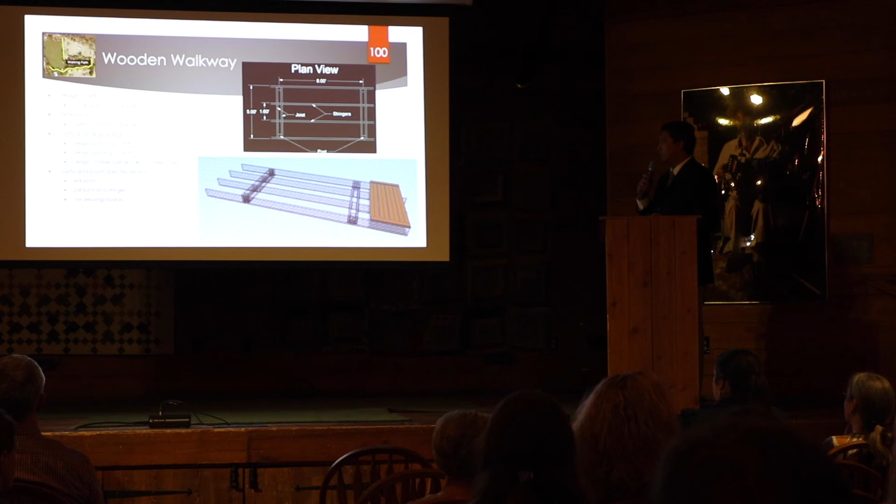According to ADA compliance, ADA requires a minimum of 3-foot width for any kind of walkway or accessway. We went ahead and designed this to be a 5-foot width in order to accommodate different pedestrian traffic from either side. This design comprises 2x8 boards as stringers and beams, 4x4 posts as supports, 1x6 decking boards, and 1x4 boards for wheel stops.

The design lumber species for this purpose is number 2 southern pine, pressure treated for ground contact to prevent it from rotting and from termites.

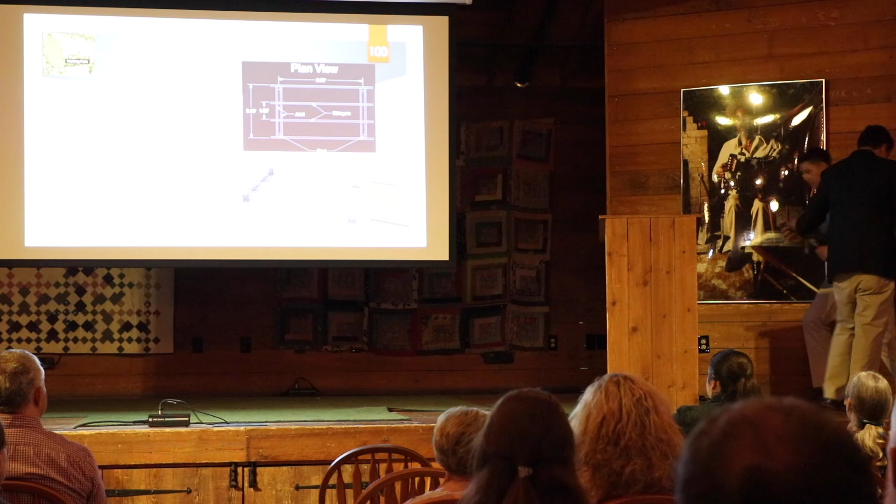So we're going to conclude tonight's presentation by discussing some of the permitting requirements that come along with this project, and then detailing some rough construction cost estimates that we developed.

Because of the nature of this project, there were permitting requirements at the federal, state, and local levels. I'll begin by highlighting a few of the main federal permitting requirements.

First, USACE, the United States Army Corps of Engineers, requires a permit for all outfall structures and associated intake structures, where the effluent from the outfall pipe is regulated by the National Pollutant Discharge Elimination System.

Next, FEMA, the Federal Emergency Management Agency, requires a permit for all development or construction within any special flood hazard area. Being that our site is within an AE flood zone, we are within that special flood hazard area. Therefore, a permit must be obtained from FEMA before development can begin.

Lastly, because we are within such close proximity to an airport, the FAA, the Federal Aviation Administration, requires that a construction notice permit be filed before certain construction activities can begin.

I'll move on and talk about some of the more important state and local permitting requirements on the following two slides. At the state level, an important category of environmental permits that must be considered for this type of project are water discharge permits, which are issued by the Louisiana Department of Environmental Quality.

Temporarily, a construction activities water discharge permit, which authorizes temporary stormwater discharge from construction activities, must be filed. Permanently, a general water discharge permit, which will authorize the stormwater discharge from our passive outlet, must be filed and maintained for the entire life cycle of that outfall structure.

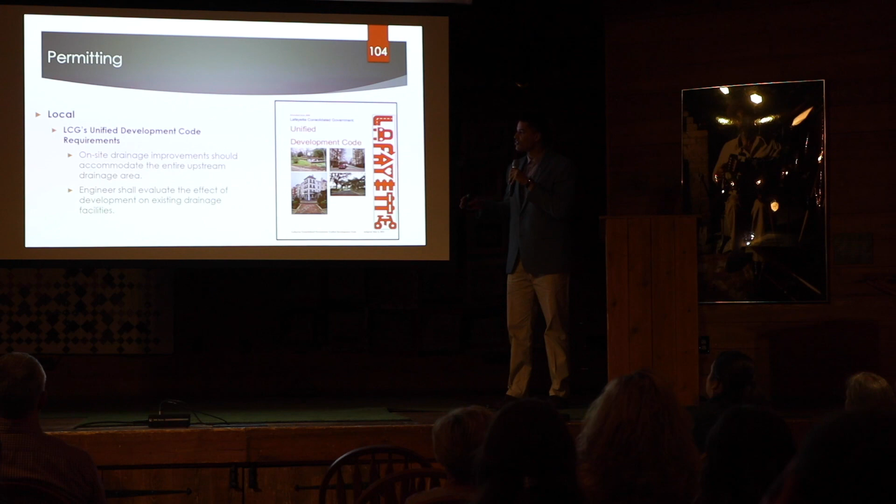First, the UDC requires that on-site drainage improvements accommodate the entire upstream drainage area, whether that's inside or outside of the new development. The size of the watershed being considered in our hydrologic design calculations does satisfy this requirement.

Next, the UDC requires that engineers evaluate the effect of a development on existing drainage facilities. We were able to conduct this evaluation by running the pre and post hydraulic models that were discussed earlier in the presentation.

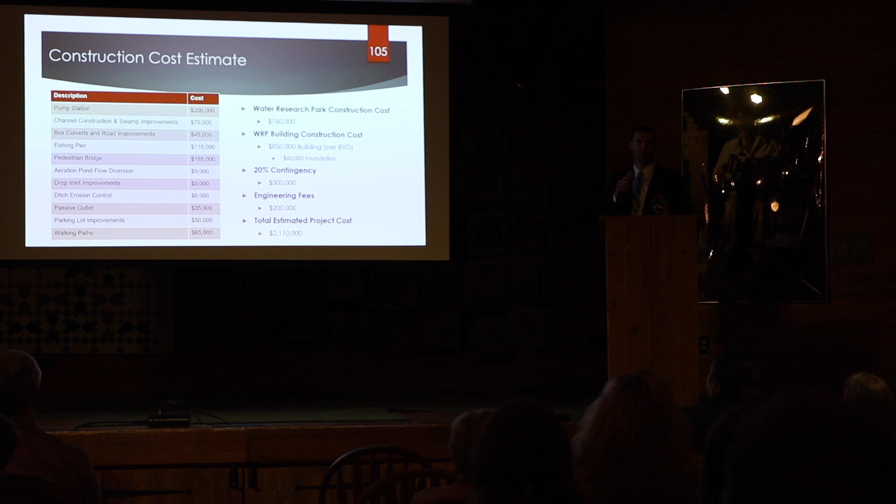All right, so lastly, we were able to come up with a construction cost estimate for how much it would cost to build a water research park. On the left-hand side of the screen, you can see a table with a breakdown of how much certain features would cost. I'm going to highlight a couple of them for you.

The pump station is going to pump the water from the Vermilion River. It costs about $200,000. The fishing pier comes in at about $110,000, and the pedestrian bridge comes in at about $165,000. You add up all the costs within this chart, and the water research park alone comes up to a total of $760,000.

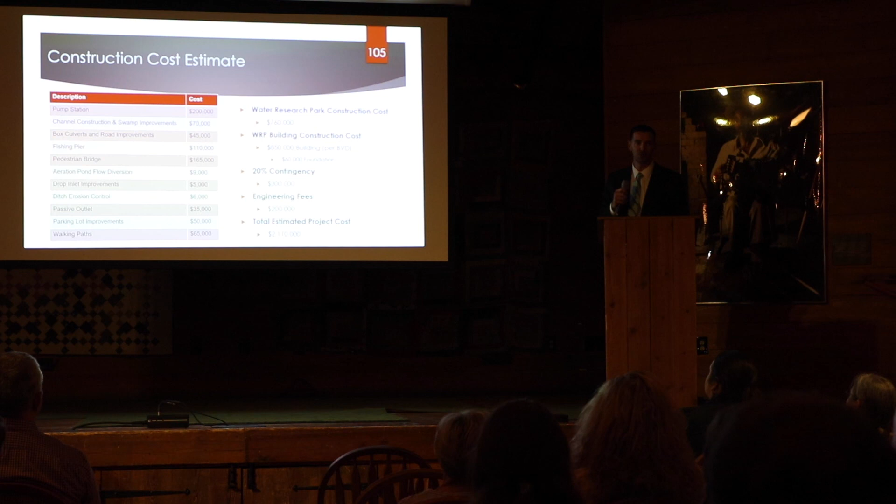The construction cost for the water research park building was given to us by BVD, which comes from the architect, at about $850,000. We were able to confirm that the foundation itself comes in at about $60,000. If you put a 20% contingency on that, you come up with an extra $300,000, and engineering fees at $200,000, your final project cost comes just over $2.1 million.